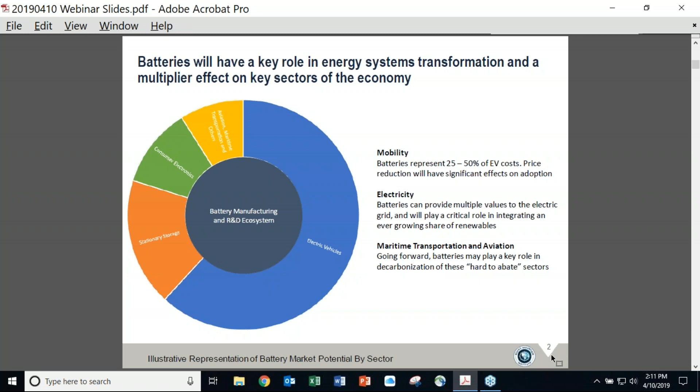Going to the next slide here, we think about the choice of battery technologies, chemistry, and architecture. Some of these choices will have significant downstream implications on product design and upstream implications on infrastructure planning as well.

Batteries will, for example, help us think about what the mileage and charging requirements for different vehicles would be, and hence where charging and swapping infrastructure could be located, what the effect on urban planning and city design will be, and where we need substation improvements and investments in infrastructure.

And then thinking about the electric grid, where natural gas pipelines or transmission lines will need to be built, and even going further and thinking long term about electric aviation and electric maritime transportation, where airports of the future could be built, and what impact that will have on urban design and city design.

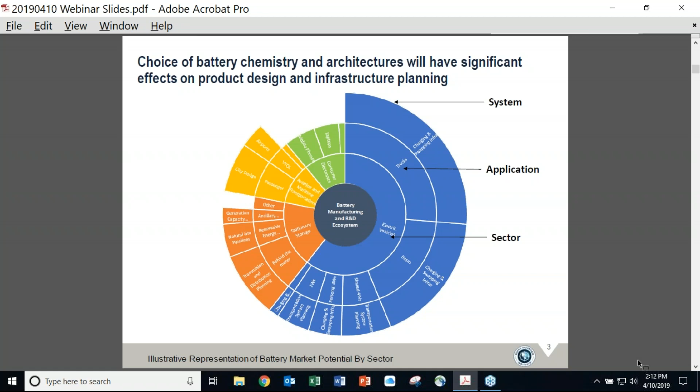Going on to the next slide here, we believe, given the importance of batteries in energy transformation as well as the economy, there are multiple reasons to think why certain breakthrough technologies might be feasible, might be achievable within the near to midterm future.

Think about investments in battery startups worldwide, which were at about $1.5 billion in the third quarter of 2018, government investments and interest in alternative battery technologies, as well as some of these new financial instruments. Let me talk about a couple of these in more detail, particularly government's interest in some of these new alternative battery technologies, as well as how a diverse set of players are starting to invest in battery technologies.

Moving on, governments across the world, whether it's Japan or Europe, Germany and France, or India, are taking a serious and significant interest in battery technology advancements. That comes from a need to secure mineral supplies. It comes from a need to prioritize energy security, and it also comes from a need to maintain competitive edge in this rapid economic transformation that we're seeing globally.

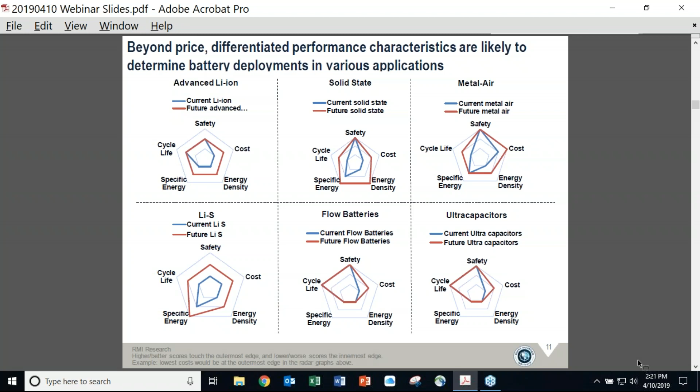Moving on, so what does that mean for regulators here, especially on the electric side in the US? We're already starting to see how costs of solar and storage bids coming in from Colorado, Nevada, Arizona, and some of the other states here in the US are starting to plummet quite significantly.

We did some initial modeling for clean energy portfolios for 2025. Clean energy portfolios composed of solar, wind, demand response, efficiency, and storage. And what we predict is that by 2025, you could start seeing economics of clean energy portfolios significantly compete with combustion turbines and combined cycle plants.

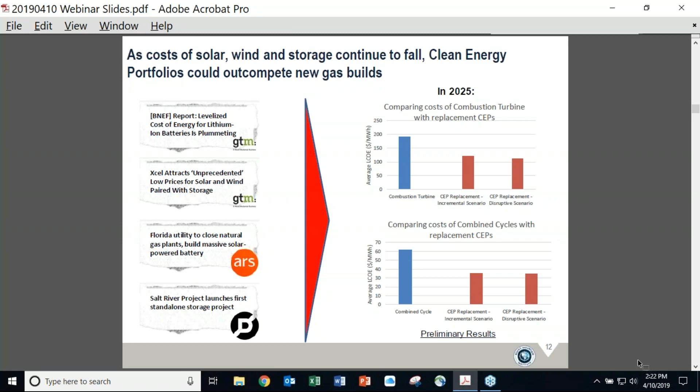And that increased delta between the costs would be very, very essential in nudging utilities and regulators and planners away from current plans for these gas plants. And then what does that mean for regulators? So I talked a little bit about diverse value streams for storage technologies.

So I think what we need to do, at least from a modeling perspective, is have models that can span multi-year planning and sub-hourly operational characteristics, just because current models are not built in a way that can account for these specific value streams that storage can provide. I believe that one of my co-panelists will be talking a little more about these modeling methodologies.

But the second point that I really want to stress on is delayering of electricity system services, which essentially implies that we might want to slice the load curve, especially during hours of peak system requirements, into some layers that correspond to 2 or 3 or 4 or 5 or 6 hour requirements, each of which can be catered by different battery and storage technologies with advantages and niches to meet those types of requirements.

And the second one that I want to talk about here in this slide is around technology neutral approach. We've seen that ISOs across the country have filed their responses to FERC 841. And several ISOs have come forward by specifying pretty strict compliance rules for what type of storage technologies they'd like to see, especially around duration of discharge.

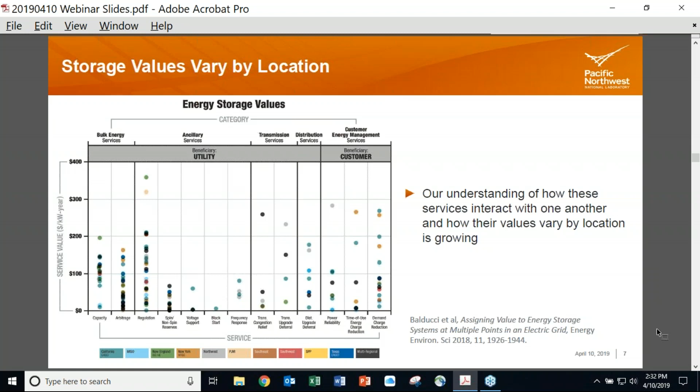Traditionally we're looking at a resource and saying, we need generation, we need capacity, we need energy. Where on the transmission grid will something fit? But as you can see with energy storage, we have to ask a lot more deliberate questions up front. You have to look at, okay, what do I want this device to do? What are the services that I need on my grid? Not just energy and capacity, but also ancillary services, black start, resilience, whatever they may be. But having a deliberate analysis that identifies what you need the device to do up front, and then that will inform not only the type of technology that you select, but also how big it needs to be and where you need to put it.

Next slide, please. So as we're looking at all these different values, this is just kind of a representative analysis that we put together. That first line that you see is the energy price, basically the market energy price that a storage device would see, a simulated energy price. And that second row, arbitrage only, that's what the device will do in the arbitrage only case, where it's just being told to buy low, sell high. And that third case, we've added balancing. So we're allowing the device to provide frequency response reserves, regulation reserves.

And then in that fourth case, we've assumed that there's a local distribution line where you see in that green circle, if we allow the device to discharge on a specific feeder at a specific time, we can delay or potentially displace an investment in the distribution system. And then in that final case, we've added a reactive power application where we're allowing the device to provide some volt/VAR service. But the takeaway here is that as you layer on all these different services, as you allow the device to pursue these different values, the way that it functions, the things that it does will change pretty significantly. And the key takeaway is to look at that second row, arbitrage only, and compare that to the last row where we have all the services in there. And that arbitrage only case has pretty much disappeared.

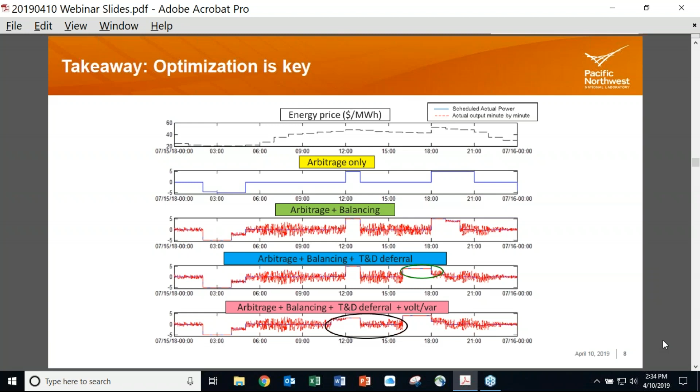And that's pretty consistent with what we've seen. Generally speaking, in the analyses that we've done, that we've reviewed, this arbitrage only, this classic time shift application for energy storage generally tends to be a pretty low value. Of course, there are exceptions, but in general, it's a pretty low value. It represents a pretty small fraction of the overall benefits that an energy storage device can generate for the grid. Next slide, please.

So, summary again, when you're evaluating energy storage, you need a much more detailed methodology than what we've historically done in resource planning. You need to look at the siting and the sizing of the energy storage device. Again, what do you need it to do? What type of device, what size of device will best provide those services? And where can you put it to maximize the value of those services? You need to look at a broad set of use cases, considering all the things that the device can do. Not only considering all it can do, but capturing the trade-offs, because energy storage can do a lot of things, but it can't do all the things at once.

So you need a model that can look at what are the highest values and how can we optimize the device around those values. Regional variation, of course, considering the impacts of different market structures that the device may face. Utility structure, if you are in a vertically integrated utility, what are the transmission needs of the utility? What are the values created through the rates and tariffs of the utility? Things like demand charges, time of use rates. And then finally, battery characteristics. This is a developing area of research that we're putting a lot of effort into.

What we've learned from these early deployments in energy storage is that the way you use a device, particularly a lithium-ion device, has pretty significant impacts both in the short-term performance of the device as well as the long-term useful life of the device. And so what we're trying to do is capture and understand what those impacts are, how the device changes under different use cases, and capturing those impacts in the modeling that we do.

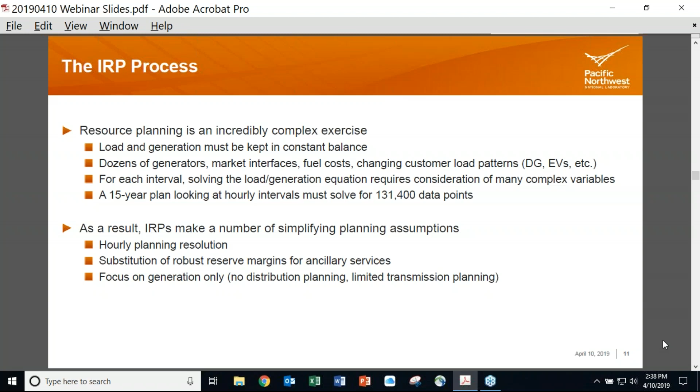So what we do historically with our IRPs is we make a number of simplifying planning assumptions to make this all work. We keep it to an hourly planning resolution. We substitute robust reserve margins for ancillary services. We don't try to optimize the model for frequency response, for spinning reserves, for all these different services. We just have a robust reserve margin to make sure that there's reserve generation that can provide those services as needed. And then we focus on generation only. We don't plan the distribution system in the IRP, and there's limited, if any, transmission system planning as well.

Next slide, please. So going back to that stacked value graph that we were looking at, that arbitrage only case, that's going to be the only case that's going to be captured in a traditional IRP model, this buy low, sell high approach. But all these other values, all these other services aren't going to be captured in that traditional model. It's not going to see ancillary services. It's not going to see distribution deferral. It's not going to see reactive power optimization.

And so the challenge you end up with in a traditional IRP model is that you've captured all the costs of energy storage. Those are readily apparent, and you've captured those in your modeling, but you've run it through a model that is capturing only a fraction, in many cases a small fraction, of the benefits. And in that regime, it's very difficult, if not impossible, for an energy storage device to appear cost effective. Next slide, please.

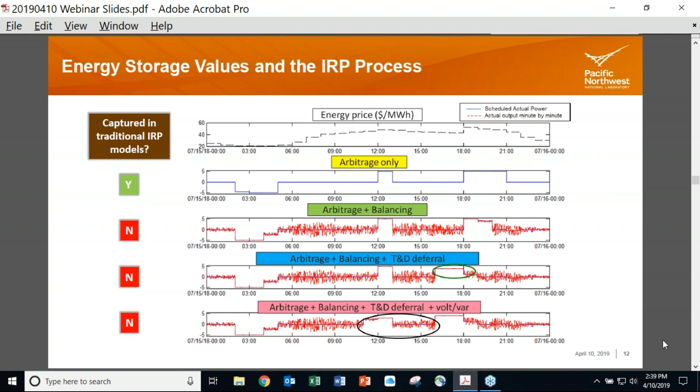So one thing we've done at PNNL, we recently did a look at 21 recent IRPs from across the country, and we've got a forthcoming report that actually went to the editors this morning, so hopefully will be out by the end of the month. But what we asked was, given these challenges, given these limitations for energy storage, how are utilities around the country adapting to that? And so just high-level findings, 15 of these 21 IRPs that we looked at did include battery storage in their process.

And of those 15, I need to amend this. We actually updated the report yesterday. So 9 plans did not select battery storage. 4 plans selected batteries in their preferred portfolio, and 2 plans selected it in an alternate portfolio. I apologize for that.

And then we also looked at how pumped hydro storage is being treated in that. And what we found is that 10 of the 21 utilities were looking at pumped hydro storage. Of those 10, 7 plans did not select pumped hydro. 2 plans did include it in their preferred portfolio, but those were expansions of existing facilities. They were not new builds. And there was 1 utility that had a new build in an alternate portfolio.

Next slide. So one of the interesting things that I took away from this work that we did was that utilities are still relatively uncertain when it comes to how much a battery device costs. What you can see here is that for the cost assumptions that were disclosed in the IRP process, you had a pretty tight margin on the combustion turbine assumptions and the pump storage assumptions, which you'd expect. These are mature technologies that utilities have a lot of experience with.

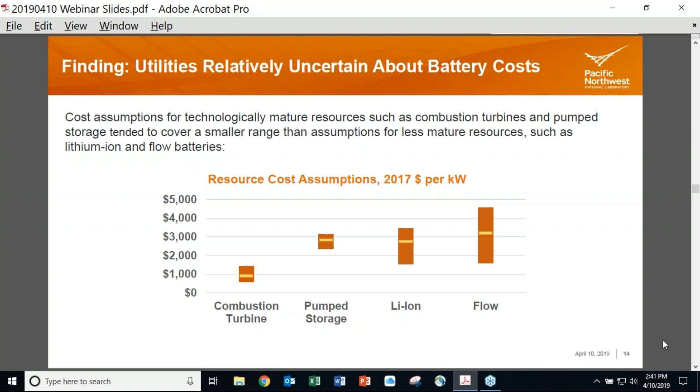But when you look at the battery technologies, lithium-ion and flow, there's a much wider range of cost assumptions, suggesting that utilities are still very uncertain about how much these devices actually cost. Next slide, please.

So just again, the key takeaway is that as these additional values of energy storage, as these additional benefits are considered in the model, reflected in the model, you become much more likely to identify cost-effective opportunities for energy storage because, again, your model already has all the costs in it. And as you build up those benefits, as you identify those additional benefits, you're more likely to even the scales. Next slide.

So emerging planning models. So again, given these challenges, given these constraints, what are utilities doing around the country to address them? A few practices we've identified. First is this net cost approach that Portland General Electric developed in their 2016 IRP. What this does, essentially, is it takes the energy storage device and runs it through a separate model, a model that's capable of identifying what all those sub-hourly benefits are, those granular benefits that aren't going to be captured in the IRP model.

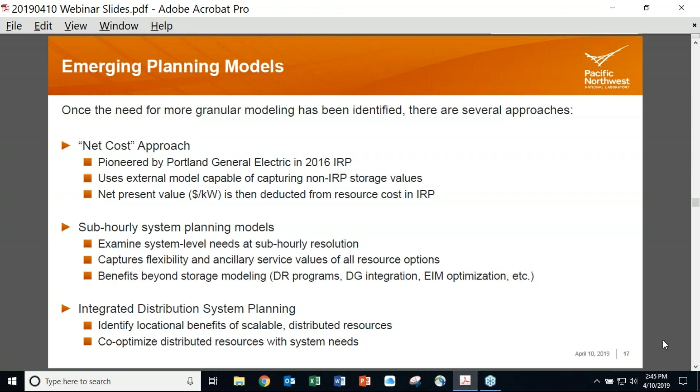Another thing utilities are doing is integrated distribution system planning. That's where they're coming up with a mechanism to incorporate the distribution system planning and the resources that are being selected there, and reflect those resources in the resource planning process. Next slide, please.

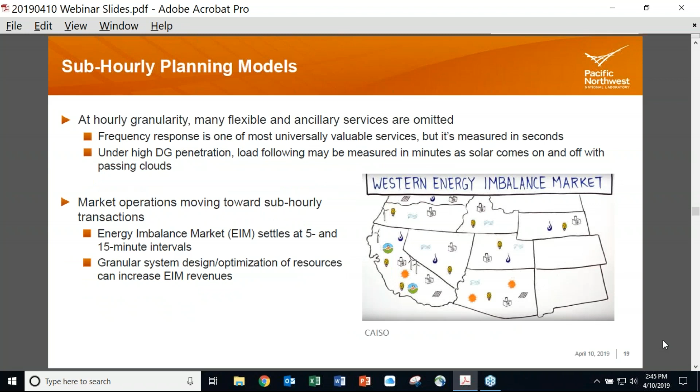Sub-hourly planning models. I'm running short on time, so let's just go ahead and move to the next slide.

And then how can we take that device that's providing this service and then include it in the integrated resource planning process to figure out what other benefits, what other services can it provide? And I've provided links to a few examples of where this is happening.

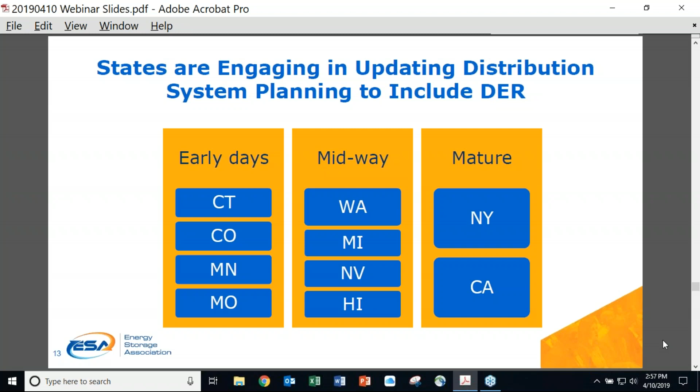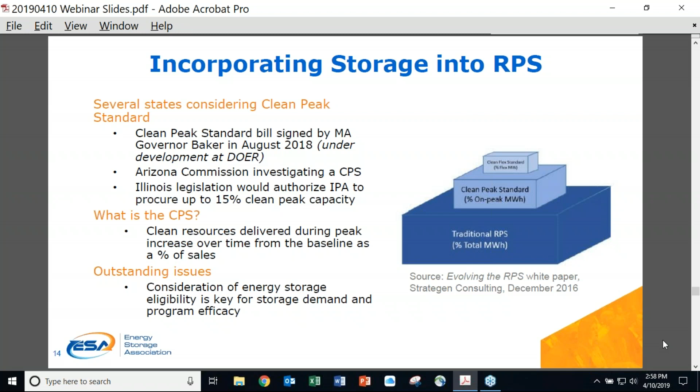I'll note that the Clean Peak Standard is an interesting market-based solution to drive energy resources to periods of high cost and peak periods where there's high demand, and a very innovative approach. The key issues to think about is how to consider standalone energy storage and eligibility of resources, and I think that there's a lot of work and thought leadership to be done here in this space.

Next slide, please. So the last couple of slides are in the access category, in facilitating access for energy storage resources. Multiple use application frameworks are very important. The benefits of allowing an energy storage asset to provide various applications from the same asset are obvious to most, but it's not only about saving ratepayer dollars by allowing the same asset to provide multiple services and benefits using the same rate-based asset, but also because the more revenue streams that an energy storage system can capture, the better the economics and the more systems that will be deployed.

So I'll call out that New York and California are really at the forefront of creating working groups at the regulatory level to think about ways to overcome any hurdles that there might be for the same asset to provide multiple applications. And I'll also call out that in Maryland, a bill that passed just last month, House Bill 650, creates a pilot program to test out these very kinds of commercial and regulatory models.

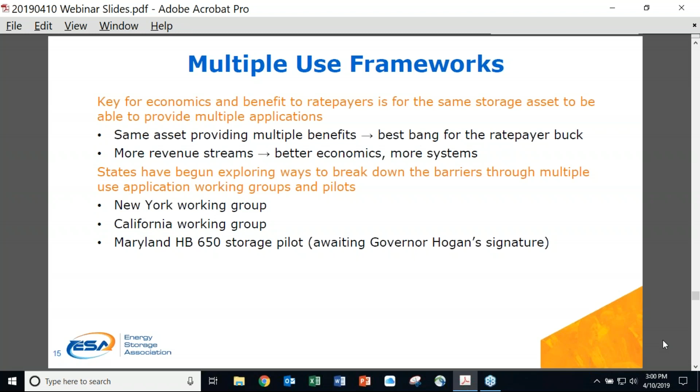Distribution interconnection, a very important piece, because no matter what kinds of policies are being implemented to drive deployment of energy storage in one state, if the energy storage systems cannot interconnect into the grid because study timelines are onerous or upgrade costs are too expensive because they don't represent the actual expected behavior of the storage system, then you're not going to be able to see as many of the storage assets deployed onto the grid. And so updating distribution interconnection standards to better reflect the behavior of energy storage is critical.

I'll note that Hawaii, New York, Nevada, and Arizona have all updated their interconnection standards to reflect energy storage system behavior and needs. All of them have many components that should be the gold standard for energy storage. And then many other states are in various stages of revisions to their rules and have engaged stakeholders in a very good and productive discussion, including Maryland, Minnesota, North Carolina, Colorado, and Michigan.

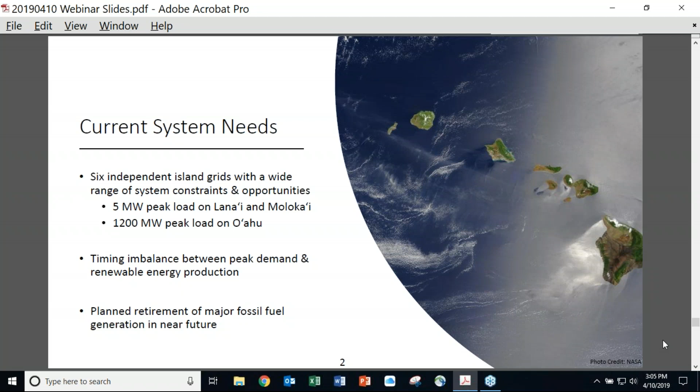The Hawaiian Electric Companies just completed the first phase of an ongoing competitive procurement process for renewable energy and storage across its service territories. So in the next phase of the competitive procurement process, we are anticipating bids for renewable energy paired with storage and also aggregated resources, some of which will have behind-the-meter storage and some of which may be standalone storage. We're expecting these storage services to replace many of the services that have been provided by fossil generators that will be retired. Next slide, please.

So just as a little agenda, my presentation will focus mainly on 2 topics, including how the Commission is working to incent cost-effective adoption of distributed storage through distributed energy resource and demand response program and rate design. And the second topic of my presentation includes how market-driven procurements are accelerating grid-scale storage integration here in Hawaii. So in my next slide, I'll talk about Hawaii's distributed energy resources, or DER, and demand response, or DR, efforts.

So it's really important for rate design and DER programs to keep pace with an evolving system. So in 2015, the Commission closed the net energy metering program to new customers in order to provide better incentives for grid-supportive DER. This was done mainly to mitigate grid integration challenges and to establish pricing for new programs that's more aligned with the economic value of DER resources. In 2015, the self-supply DER program was also created, and this allows customers fast-tracked interconnection of non-export DER systems. This tariff was designed to be flexible and adaptable to grid requirements along with evolving technologies such as storage.

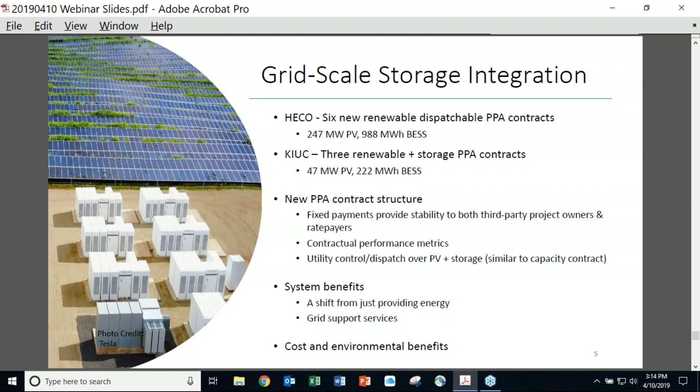For my last slide, I'm going to be providing a brief overview of several proceedings here in Hawaii in which the impacts of storage technologies are being considered. Last week, in response to Commission guidance, the HECO companies issued their Phase 2 draft request for proposals for dispatchable and renewable energy. A primary focus of the competitive procurement process will be to replace energy and services from Hawaii's largest existing fossil generators, as I mentioned earlier in my first slide.

Second, for the community-based renewable energy program, the Commission has also recognized that the incorporation of battery storage is expected for the second phase of this program. The compensation structure that's planned for Phase 2 of the community renewable energy program will require peaker community renewable facilities to deliver at least 85% of their output during the on-peak time period. Third, for the integrated grid planning process, distributed and utility scale storage technologies are a major component of the electric company's planning.

Fourth, in terms of Hawaii's performance-based rate regulation proceedings, Commission staff published a proposal earlier this year that discusses how storage could be integrated into the design of different utility performance mechanisms. Fifth, for the electrification of transportation, the Commission has had several docket proceedings on that matter. And then finally, for microgrids, the state passed legislation last year that directs the Commission to establish a microgrid service

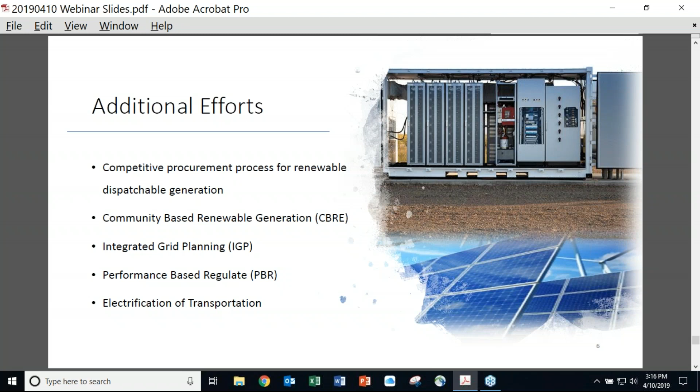So that concludes my presentation. I just want to say mahalo for listening to me share about how storage fits into our regulatory efforts here in Hawaii.

Great. Thank you very much, Clarice, and thanks to all of our presenters. First, I want to make another call for questions from the audience. We have a number, which I'm going to pick up at the moment, but also want to just cast the net out again. So first, I want to pick up a question that came from a fellow commissioner. Since we have a regulatory audience, want to make sure we field the questions from decision makers in our audience. And I'll maybe try to paraphrase or recast the question a little bit and ask it to three of our panelists, Aman, Nitin, and Jeremy, and then maybe ask Clarice last.

But the question is really about how should regulators, decision makers, be thinking about this. It's a technology with rapid innovation, lots of potential change for the future. So we're in a position of having to authorize investments today, sign off on long-term contracts. So how do we feel comfortable with signing off on these investments when we know that there's going to be continued change and innovation?

And it's a question of, do we wait and see what future potential improvements are, or maybe put it this way, what sort of contractual and decision guarantees do we look for to help insulate customers from some of this potential future change and risk? So let me cast that out to the first three, and then maybe Clarice can talk about some of the provisions of recent contracts we have that help address some of this.

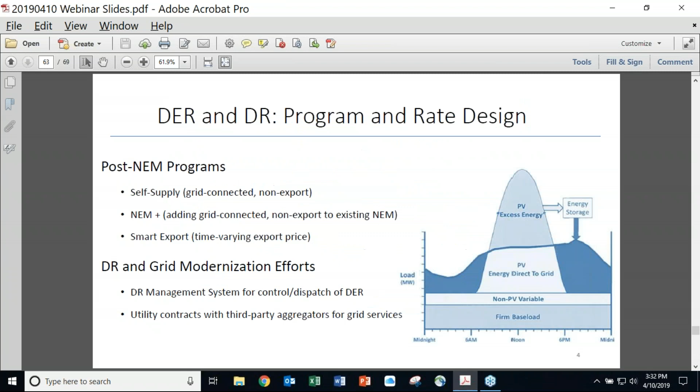This is something that we're kind of heavily in the middle of here in Hawaii. I'd be curious just to see your thoughts on where this is being done well or how to do it well. I would also just add this, we're part of this joint task force with NRRI on planning, and almost every group there, I think this was a need identified. So I think the common thread is that this will be an increasing trend throughout the country of how their utilities and regulators think about this. So, just your thoughts and the rest of the group on how we better integrate these systems that have very traditionally been separated. So I'll leave it at that.

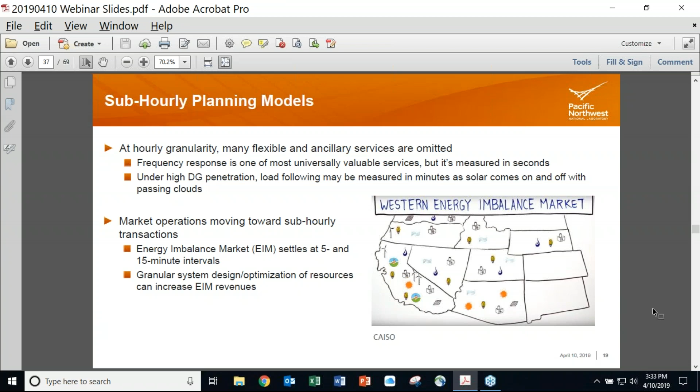Yeah, I will do what I can with that. So I would actually point to Hawaii as a leader in this space. So I'm not sure I can really give you anything that will be ahead of where you're at. One of the fundamental questions you have to ask is, are you in a vertically integrated utility or are you in a market-facing utility? Because the way you go about this is going to be very different. Especially with recent orders like FERC 841, the markets are moving in this direction where they're trying to figure out how to allow these distributed resources to provide system needs. How do you incorporate that into the bidding process for the market? It's a little trickier in a vertically integrated territory.

I'd point to the work you've done in Hawaii and what HECO did with their modernization plan. I think of that as really leading the nation. Minnesota has had a very long running and very deep proceeding on distribution system planning. I recommend looking at that docket if for no other reason that I can't think of anywhere else off the top of my head where you'll find such a deep resource on distribution planning. They've had multiple workshops with a lot of very intelligent people, and a lot of good stuff has come out of that. I would look at New York and the REV process.

REV, Reforming the Energy Vision, has become a lot of things. But if you go back to the core, the idea was how do we remake the grid at a locational level? How do we achieve resilience through distributed operations? And so a lot of the work that came out of REV, especially the early work, was really about how do you plan the system on a more granular level? How do you start at the local level, address local reliability needs, local resilience needs, and then roll that up into grid operations? So I would suggest looking there as well.

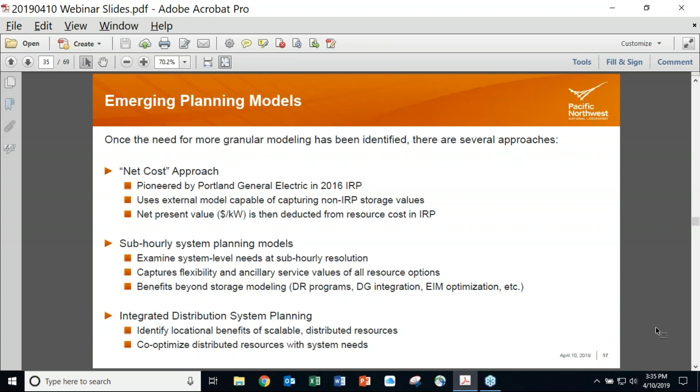I'm just curious. I think there's a more generalized point here beyond just the wholesale market participation, because we have solicitations here where this is a question, and I'm curious to hear more on how you think through this idea of designing regulations with key outcomes and requirements instead of operational attributes. You pointed to the requirements on duration of discharge. Can you just talk through in more detail what sort of outcomes you think should be in there, and then also how do they have enough specificity that they become enforceable in contracts? I think the general point's well taken, but how do you see operationalizing this in a broader context rather than just in these wholesale market participation rules?